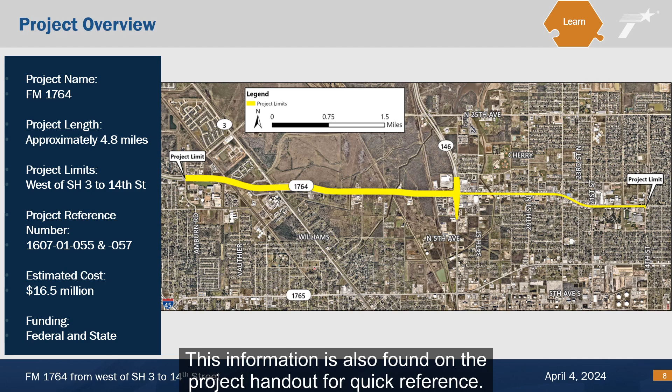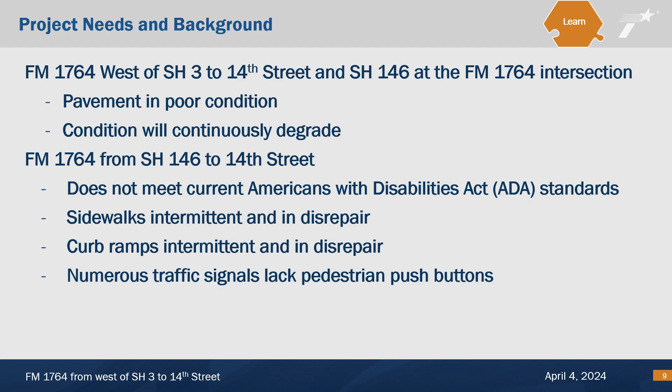Now I'd like to provide some background information and facility needs. The pavement on FM 1764 within the project limits, and on SH 146 at its intersection with FM 1764, is in poor condition. In addition, the section of FM 1764 between SH 146 and going eastward to 14th Street does not meet current Americans with Disabilities Act, known as ADA, standards. This section of the proposed project has intermittent sidewalks, some of which are in disrepair. Curb ramps are also absent at numerous driveways, and several intersections do not have traffic signal pedestrian push buttons.

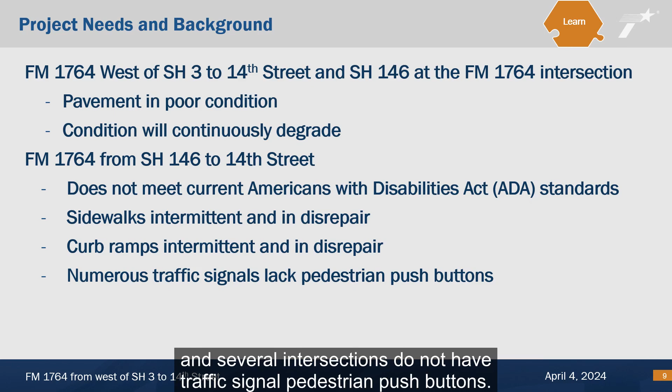FM 1764 within the project limits varies from 2 to 3 lanes, and the SH 146 frontage roads at the FM 1764 intersection are 3 lanes in each direction. East of SH 146, FM 1764 from 34th Street to 21st Street had historically been 3 lanes in each direction.

In 2012, in an effort to improve safety and reduce crashes, the outside lanes were converted to continuous right turn lanes, the current configuration. In 2023, TxDOT received a request to return the lane configuration to the 3 through lanes in each direction. In response to the request, TxDOT researched crash data from 2012 to 2021, turning movements, and average daily traffic counts along the corridor.

The review concluded that, within this section, converting the outside through lanes to right turn only lanes did not provide significant improvement of crash rates. The review also identified that more than 90% of the vehicles traveling between 34th Street and 21st Street continue straight through this section of the corridor and are not turning onto side streets. After reviewing crash rates, vehicle movements, and average daily traffic counts, TxDOT agreed with the recommendation that the lane configuration in this section should return to 3 continuous through lanes in each direction.

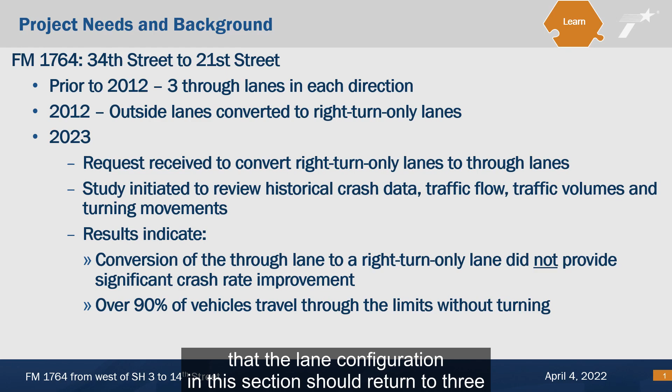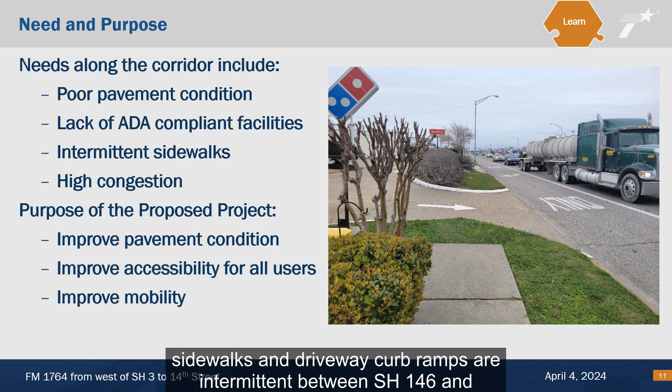To summarize, the proposed project is needed because the existing pavement is in poor condition, the corridor does not meet current ADA standards, sidewalks and driveway curb ramps are intermittent between SH 146 and 14th Street, and there is heavy congestion due to only 2 through lanes in each direction from 34th Street to 21st Street.

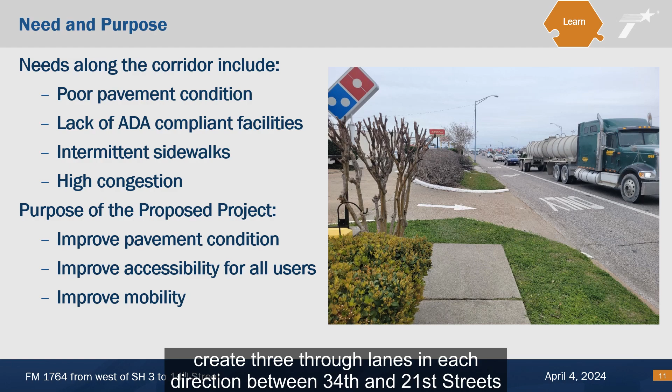The purpose of the proposed project is to rehabilitate the pavement throughout the corridor, create 3 through lanes in each direction between 34th and 21st Streets to facilitate improved mobility, and improve accessibility for all users.

The next few slides illustrate existing and proposed typical sections for the project. An existing typical section is a cross-section of how the road looks today, and a proposed typical section is how the road would look if the project was constructed.

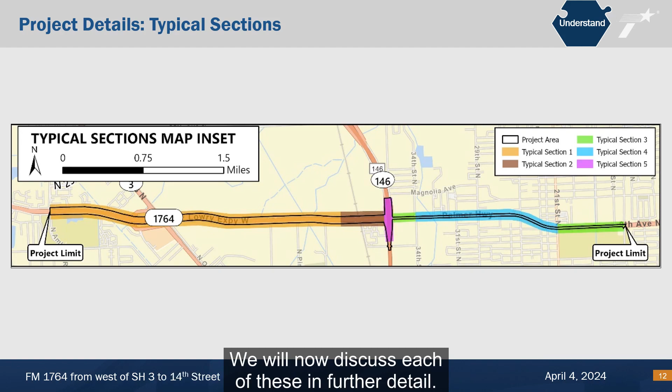As constructed today, the roadway within the project area has 5 different typical sections. The locations of each of these 5 typical sections are shown on this map in orange, brown, purple, green, and blue. We will now discuss each of these in further detail.

As shown in orange on the map inset, the first typical section spans FM 1764 from the western project limit at Amburn Road to approximately 2,500 feet west of SH 146. This segment is currently a 4-lane freeway section with 2 12-foot wide travel lanes, a 9.5-foot wide inside shoulder, and a 10-foot wide outside shoulder in each direction. An existing 5-foot wide raised concrete median barrier is located along the center of the roadway.

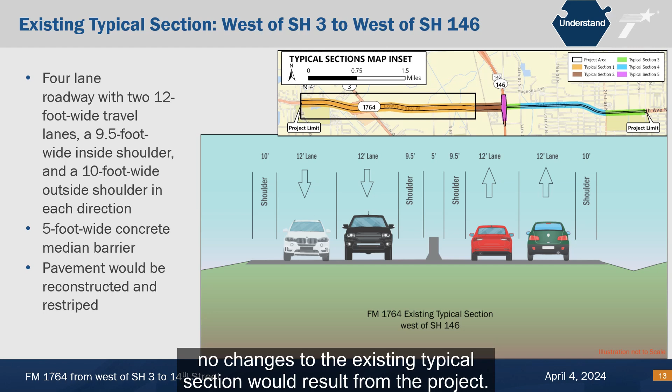The ditches are present in the grassy medians adjacent to the main lanes. Note that the freeway has 2-lane frontage roads, however, they are outside of the project limits and no improvements are proposed for the frontage roads. The pavement of the main lanes along this portion of the project would be reconstructed and restriped, but no other work is proposed. Therefore, no changes to the existing typical section would result from the project.

This slide shows the second proposed typical section, shown in brown on the map inset. This is a transition area on FM 1764 from a 4-lane section to a 6-lane section meeting up with SH 146. This segment is currently a 6-lane freeway section with 3 12-foot wide travel lanes and a 6 to 10-foot wide outside shoulder in each direction.

An existing 16 to 24-foot wide median is located along the center of the roadway. Note that the freeway section has 2-lane frontage roads. However, they are outside of the project limits and no improvements are proposed for the frontage roads. This short 2,500-foot section would be reconstructed and restriped, however, the lane configuration would not change.

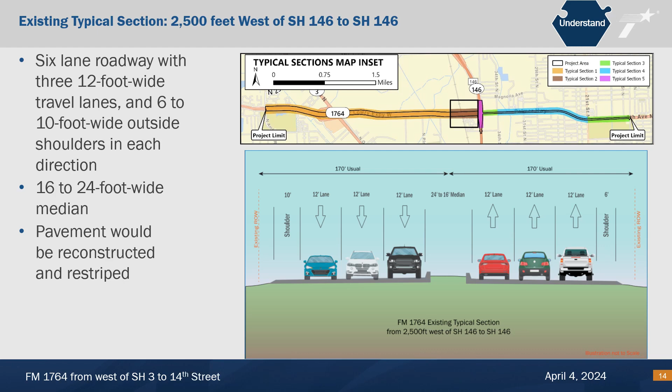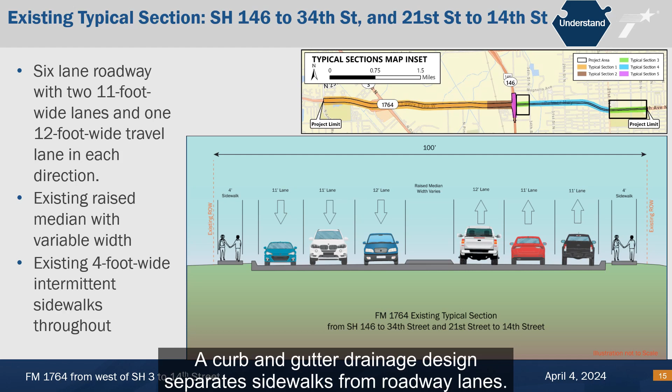The third existing typical section occurs in 2 separate locations, one on FM 1764 between SH 146 and 34th Street, and the second from 21st Street to 14th Street. These 2 locations are shown in green on the inset map. These segments of FM 1764 are 6-lane roadways with 3 through travel lanes in each direction, 2 11-foot wide lanes and 1 12-foot wide lane with a raised median that varies in width. A curb and gutter drainage design separates sidewalks from roadway lanes. Sidewalks are intermittent and are 4 feet wide where present.

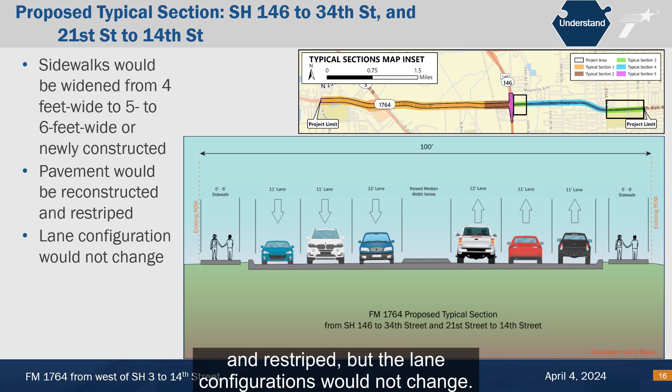This slide shows the proposed typical sections for the green areas on the map inset. This typical section illustrates what FM 1764 from SH 146 to 34th Street and 21st Street to 14th Street would look like. Within this section, existing sidewalks are proposed to be widened from 4 feet wide to 5 to 6 feet wide, and new 5 to 6 feet wide sidewalks would be constructed where not currently present. Pavement would be reconstructed and restriped, but the lane configurations would not change.

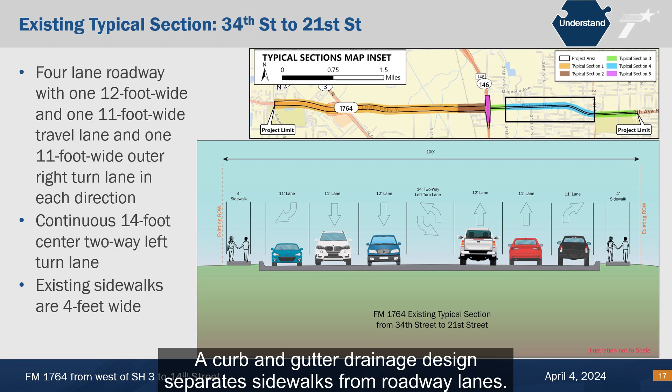The fourth typical section is between 34th Street and 21st Street, and is shown in blue on the map inset. This segment of FM 1764 is currently a 4-lane roadway with 1 12-foot wide and 1 11-foot wide travel lane, and an 11-foot wide outside right turn lane in each direction. A continuous 14-foot wide center 2-way left turn lane is in this section. A curb and gutter drainage design separates sidewalks from roadway lanes. Sidewalks, where present, are 4 feet wide.

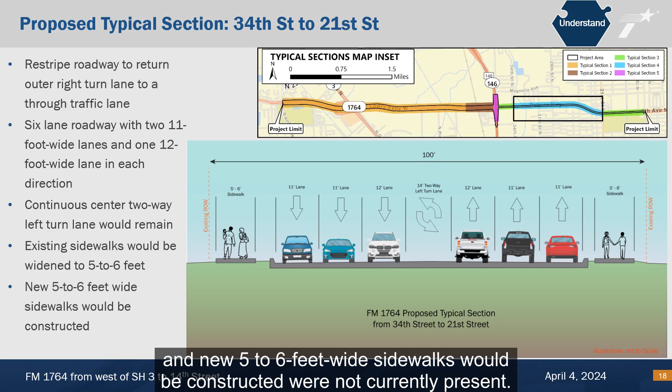As in the previous slide, the fourth typical section is shown in blue on the map inset. The proposed project would reconstruct and restripe the roadway between 34th Street and 21st Street and convert the outside right turn lane in each direction to a through traffic lane. Existing sidewalks are proposed to be widened from 4 feet wide to 5 to 6 feet wide, and new 5 to 6 feet wide sidewalks would be constructed where not currently present.

This slide, the fifth typical section, is along SH 146 and shown in purple on the map inset. Within this section, frontage roads have 3 11-foot wide lanes, and main lanes have 2 12-foot wide lanes, a center median, a 10.5-foot wide inside shoulder, and 12-foot wide outside shoulders.

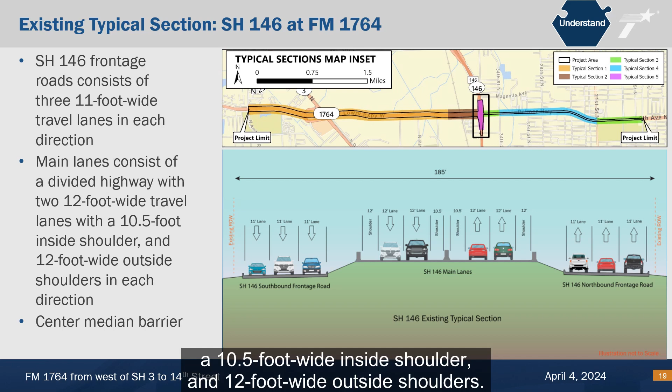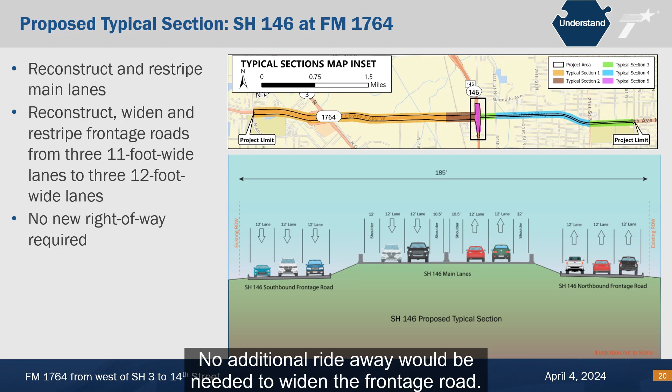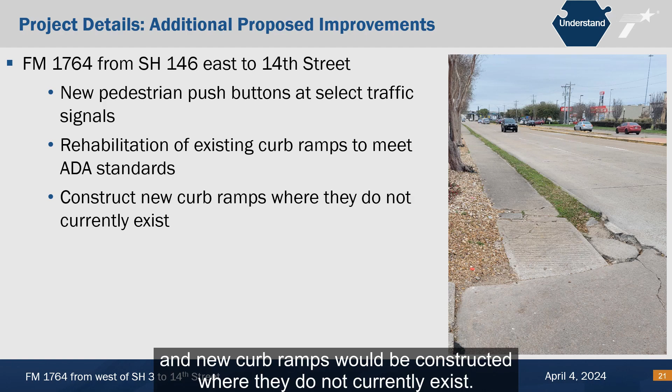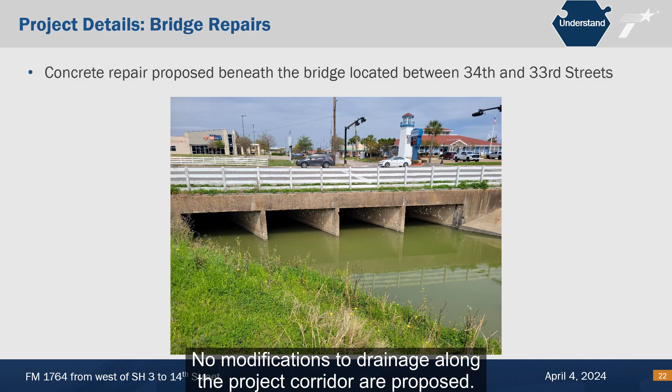In addition to the previously mentioned improvements, on FM 1764 between SH 146 and 14th Street, new pedestrian push buttons would be added at select traffic signals. Existing curb ramps would be rehabilitated to comply with ADA standards, and new curb ramps would be constructed where they do not currently exist. The project also proposes to complete some minor concrete repairs beneath the bridge located between 34th and 33rd Streets. No modifications to drainage along the project corridor are proposed.

The proposed project would not require any permanent right-of-way acquisition. Approximately 1.33 acres of temporary construction licenses would be needed where the existing sidewalk leaves TxDOT right-of-way.

A temporary license area is a location where TxDOT would need temporary access to complete construction activities for the project. The landowner would grant a temporary license to TxDOT to access their property to widen the sidewalk and/or repair or construct new curb ramps outside of the existing TxDOT right-of-way.

The contractor would be confined to working in the limited areas where a license area is proposed and agreed to. The temporary license would conclude upon completion of the project. Construction-related damages within the license areas would be reimbursed by TxDOT. These license areas are voluntary, and a landowner does not have to grant a temporary license to TxDOT. Sidewalk or curb ramp improvements would not be constructed in areas where a license is denied.

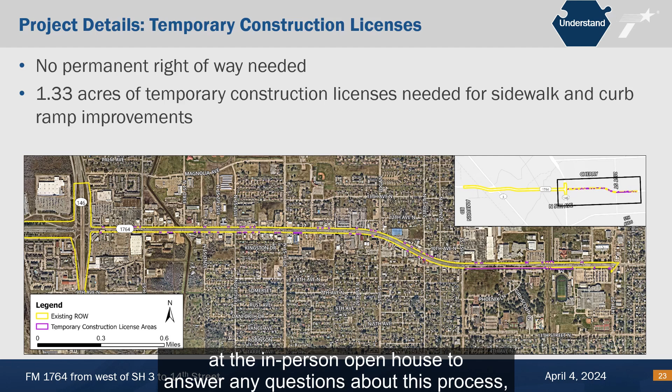Right-of-way agents are available at the in-person open house to answer any questions about this process, and contact information is provided at the end of the presentation.

The project team is currently identifying and evaluating potential environmental impacts that could occur as a result of constructing the proposed project. Resources under review include biological resources, protected lands, water resources, hazardous materials, archaeological resources, historic resources, and traffic noise. The project would be designed to avoid or minimize impacts to the greatest amount practicable.

The preparation of environmental technical reports is ongoing. Once completed, technical reports documenting the analysis and conclusions of these studies will be available for review upon request.

The proposed project would be funded with a combination of federal and state funds for a total of approximately $16.5 million.

After the comment period closes, the project team will review the comments received, make appropriate design changes, and prepare official public meeting documentation. Public meeting documentation will be posted to the project meeting webpage once completed.